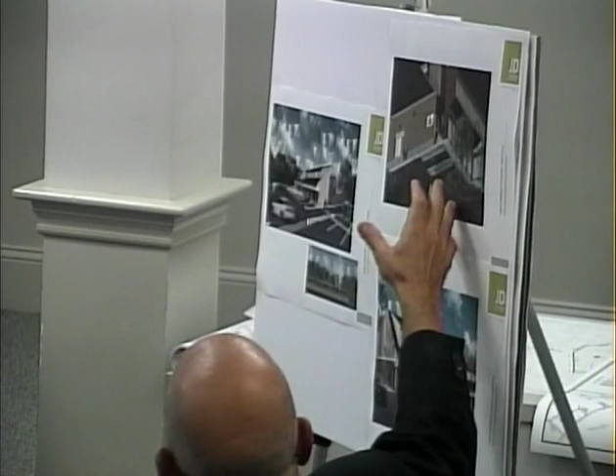So if an accessible visitor was parking out front, they could still come around. Another change was to bring in more landscaping. This was a newly created island to warm up the rear and make it look more residential.

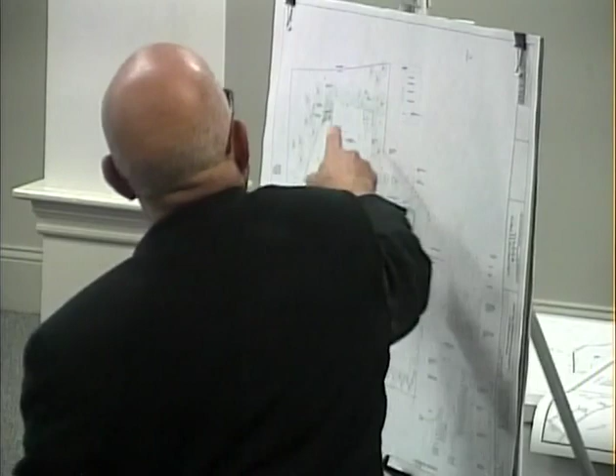At the end of this walkway, against the back lawn area, the dumpsters are presently back here. We had meetings with conservation, and they wanted us to move them farther away, so we relocated the dumpsters, and where the dumpsters were is now increased landscaping, helping that pedestrian connection as well.

Now, did I notice on the rendering at the back of the building, at the rear entrance, that there are two HP accessible spots there now? Again, two handicap spots previously as well, but this is designated for residential handicap access.

Very nice. Could I just ask — is there something I remember Tilly mentioning, about folks without HP plates wanting to just pull up and maybe offload groceries because the elevator's there? Was that just dimensionally impossible to create in any way?

I don't believe so. It's similar to the loading zone for CVS back here — anyone could be pulling up here. We noted that with a 40-foot delivery truck, you can still get around it through the aisle. So somebody could easily pull up, even behind one of the handicap spots, because of this walkway straight through, unload, and then park.

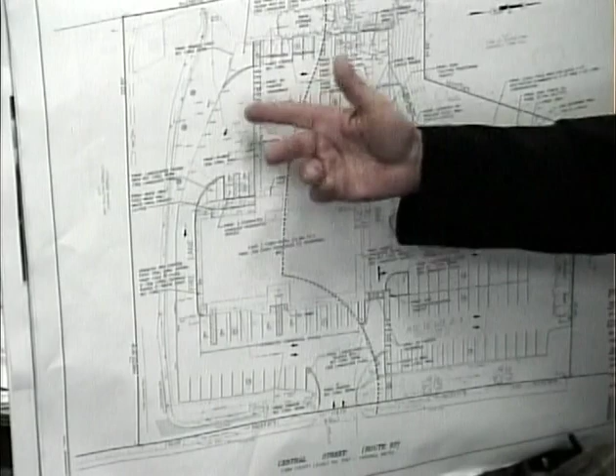What's your thought, Tilly? I think the parking for residents to carry things upstairs should be as close to the building as possible. I mean, I would contend this is 30 to 40 feet or so to go from here to there.

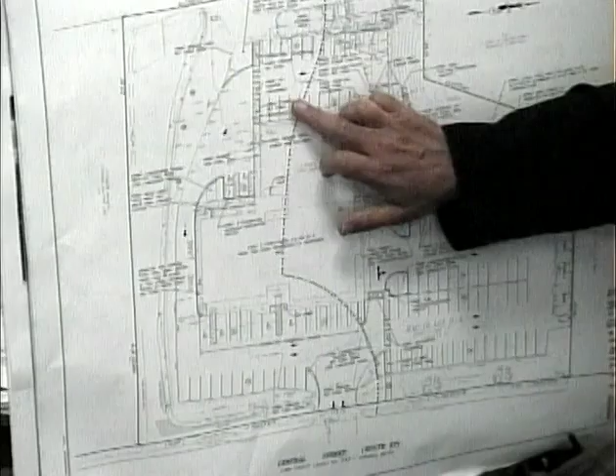I am concerned, and I'm a building owner as well, that if you put a 15-minute spot, it gets abused. People go, oh I'll move it, and then they get a phone call, and next thing it's 2 hours. It's hard to police that.

I understand the concern, but I do feel that this is a fairly short distance. Recall too that we're talking about 7 units, or a population of maybe 10 residents. But they're all gonna move their furniture in, right?

And if they don't move their furniture in themselves, the moving people will have to move it in. That'll happen from time to time, but given the site constraints and the fact that resident parking is right there, I don't know that we need to designate a drop-off spot.

Remember too, that's not the only entrance for residents. There are 2 other entrances towards the front of the building they could also use, which will get them into the building, just not to the elevator.

Can I just interrupt? Sure, one second, because they're bringing up a valid point. This is the only entrance closest or accessible for the elevator. So that'll be used a lot for people carrying things in, whether it's furniture or groceries, whatever.

I was thinking more groceries. A loading parking spot for resident parking only, just something designated for that. You go into parking lots now, and you see designated 15-minute parking, expectant mother parking, veteran parking, so on. And nobody's gonna park back there to use CVS.

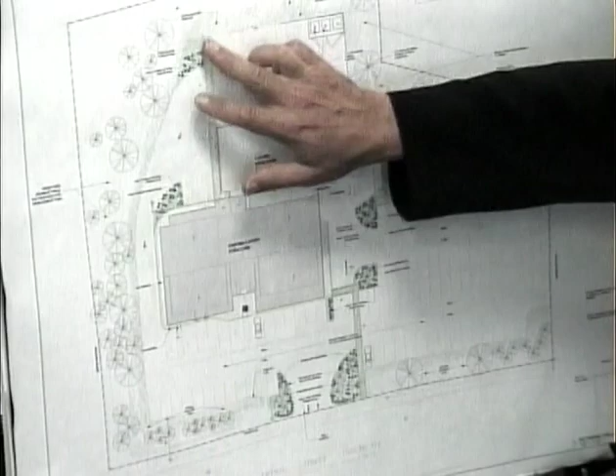The two extra landscaped islands we added in the rear are more designated, feeling this is the more appropriate residential amenity area, with a couple picnic benches back there.

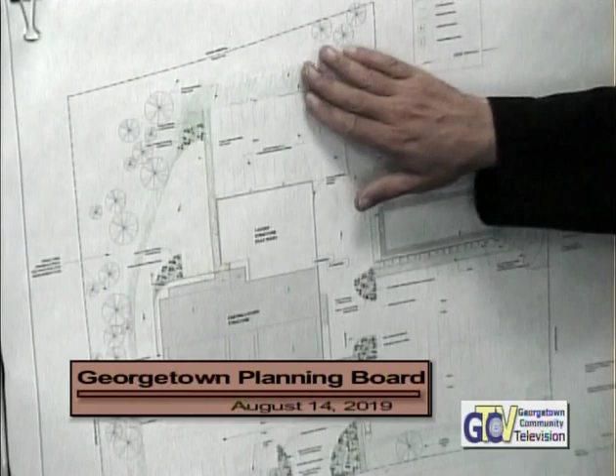That area is abutting, if I'm not mistaken, the future rail trail, isn't it John? Yeah, but there's an elevation difference there? It's not much, as you'd think—it's a very gentle slope up. Overall it's only about 4 feet in elevation change, and then it really plateaus. It'll be the old septic field there, so it's a nice flat area. You get a view of the lake.

Would people actually be able to walk off the trail and walk down to CVS? Or the people living there, can they easily get in there? Yes, there's no barrier—it's all grass, so there's pedestrian access. Very nice.

Very nice. There's a great raspberry patch there too. You found that, huh? You know, pick some raspberries, go make some muffins. For the next meeting?

The top of this septic field is fenced off for safety reasons. We're not necessarily designating it as a recreation area, but people could use it, and at least it'll be safe—no chance of falling off.

Do we have a detail of that fence? Is there a detail in the detail sheet for the fence? It's really chain link, but we're growing vines on it, so it'll be a vinyl covered chain link fence with vine growth, so the vegetation will completely obscure it.

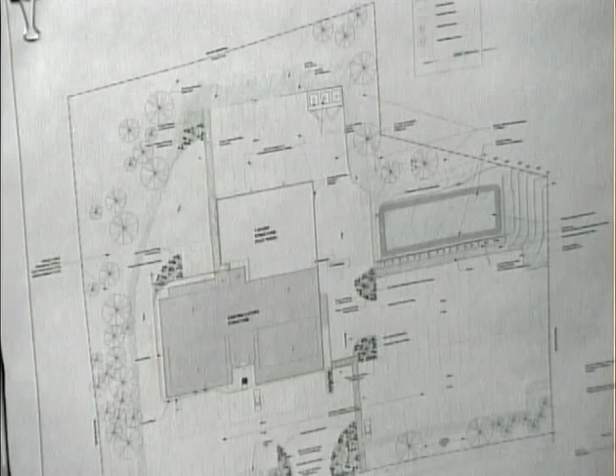Even in winter, it would not entirely obscure it, but a lot of vines—in your package we have a landscape plant guide. We selected a Virginia creeper, which actually holds on to its dry leaves as winter comes. It's still a deciduous plant, but it gets brown, then regrowth in the spring, and it'll be covered with snow anyway.

When it comes to vines, this area is excellent for grapevines. Yeah, that's natural—you could put up a trellis, get nice big leaves, and those will ripen in a couple weeks. We can have our snacks over there. I'm sure whoever's taking care of the landscaping will get creative.

Lastly, it came up in the last meeting—both John and I saw an article in the Boston Globe about 3D crosswalks. It's just a painted treatment that gives you a little pause, like 'what am I driving over?'

Is that what that is? It's very effective from what I've read. How's it oriented? Well, it's done in perspective—you basically paint it that way. We've all taken perspective drawing in grade school or whatever, so you center it and then have the vanishing points on both sides.

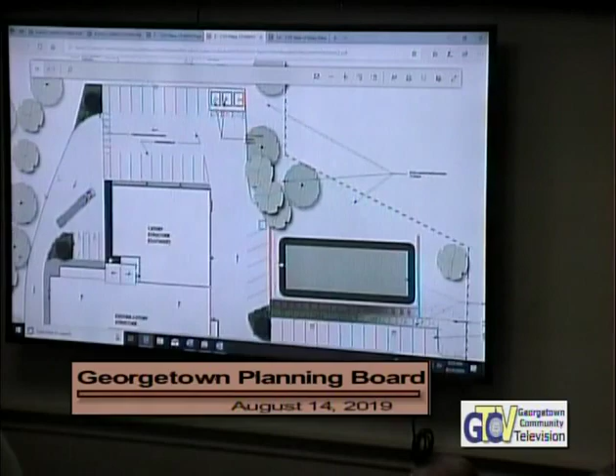People coming out of here wanting to go around the building are gonna have to step down. I apologize, it appears to be a curb, but the intention is that's gotta be flush—it's a flush condition, asphalt to concrete. So from here to here?

So there's no curb at all three of those? Still curb? It's all one line, no curb at the hatched area. So it shows a curb, but it was difficult to do that in the rendering. So that hatched area at the inside of the two walkways, the asphalt is intended to come flush to the walkways.

So you could go from concrete to concrete without rolling a cart up, or a wheelchair through it. Wheelchair, right, yeah yeah yeah.

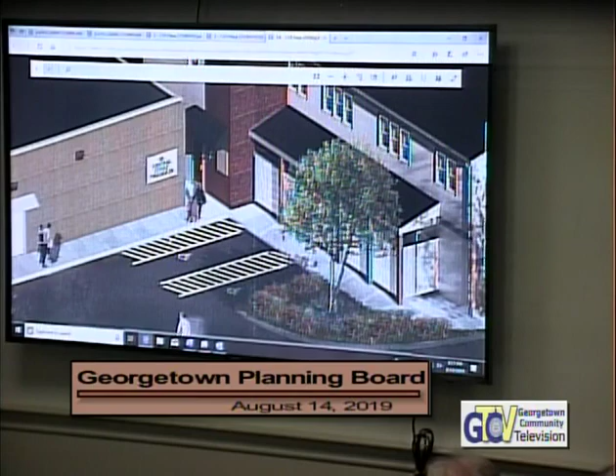We're repaving, by the way—the client's committed to repaving the lot, which was not the case on the last application. I was surprised to see that, and just to make a big difference—really rebasing grade, it's a major endeavor. Adding an inch and a half? Yeah, that's fine, that's huge. So it's all gonna be new top coat.

That'll be the high point, that inside corner of the paved area, so that can be a continuous walkway. I see what your concern was—I was going to make the concrete do that, just to visually connect them more, but we can do it with just level pavement.

You're concerned about people having to walk around that corner—by the time you're there, you'd have to step down and step back up. It's not gonna be curbed there. Now, where the curb is, is that going to be extended? He's saying there's not gonna be a curb there, it's all flush, no curb—I mean right here where the planter is. That's what I was going to ask next. Yeah, that should be flat.

It shouldn't be extended because the water coming off the pavement would go down the side instead of going right to the plantings. The asphalt in front of the planting area would be dropped compared to the inside corner back there. A lot of times we'd keep that curb for both plowing purposes and to retain the mulch bed and soil.

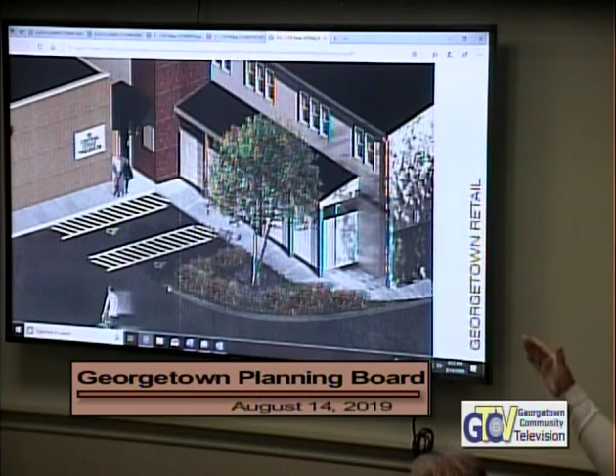Well, this is going to collect your roof water, I assume, but how is that going to happen? It has to run onto the sidewalk, and then it would go into the landscape bed there, and it would absorb into the landscape.

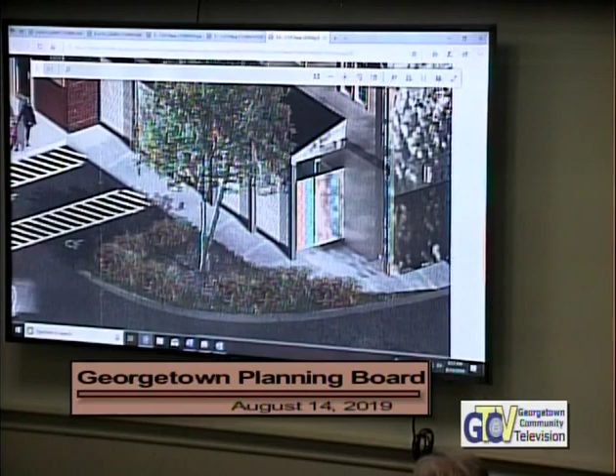Shouldn't something be at the rain pipe, at the gutter here, to collect that water? Yeah, that could be directed just under the slab, since we're pouring all new slab there, and they could run it right into the landscape bed. I think that would be a good idea, because we don't want it to ice up or anything. That's right, that's a simple solution.

So thank you, that addresses the first question. Could you bring the diagram back up again? The second question has to do with, could we look down here, and go all the way down.

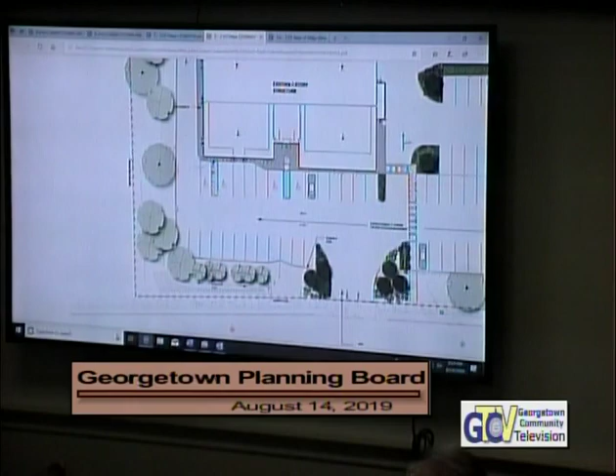That's perfect. Right now the crosswalk is right about here, across Central Street. They're doing it right in front of the post office, there's an island on either side of it. I was just looking on Google Maps. Now it strikes me as if this is probably the busiest section.

I laud the fact that you've got direct access, but I'm wondering if that access might not be better from here. That's a brook there, you're not going to get across it, you'd have to put a bridge, a footbridge. Yeah, there's a brook, it's quite flowing.

But you're driving people into the most active part of the driveway, and maybe a little bridge over it might not be a bad solution. In other words, what you're saying, Bob, if I'm getting it right, is that folks are gonna be coming out this way if they want to be pedestrians, right out of the building, walking out here, and then they have to walk across the entrance over to there to get to the crosswalk, to go to the post office.

Well, that's how it is now anyway. Yes, but nobody lives there now. I thought the same thing, but, like I said, even though it doesn't seem to be shown, I'm sure it shows somewhere on one of these, but historically there was a river there, and there has been in Georgetown, in the last 10 years, in big storms.

That area is sort of a collection area, and in those circumstances you're just as likely to have flooding going across the road. Do you know how big that culvert is, Bob? It's big, it's round, about 3 feet, it's a big water source. Yeah, I don't know, but did you mention that at the Concom?

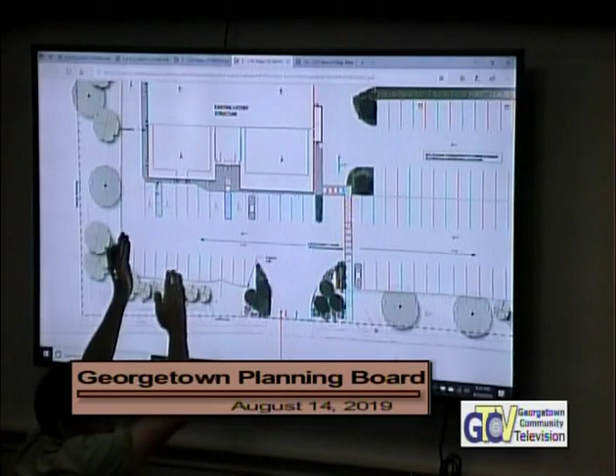No, this is another option here. All of that parking area compared to all of this parking area, where there could be a conflict between pedestrians and automobiles. This is tiny, that's huge, and this is how you get to the drive-through, it's how these people are gonna get to their own parking spots. So I'm a little concerned about that.

If it could be moved to this side, then people won't be walking across the main entrance, and they won't be tempted to just blast across the street.

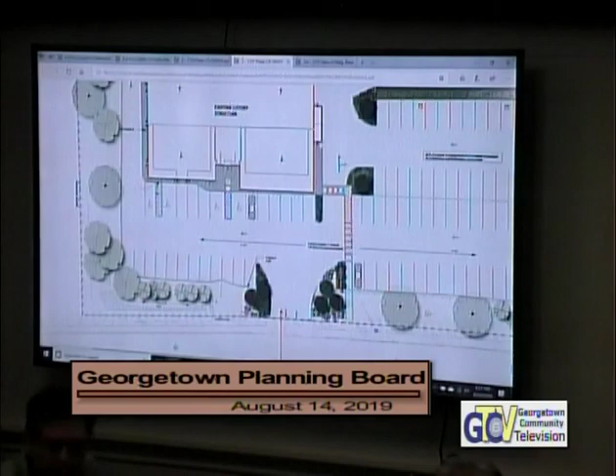We did consider that side after the last meeting and discussed it at length with the civil engineer. Part of the decision was to simplify, since we already have this crosswalk and that was critical.

Because as you say, there's more parking here, people are going to cross over. Instead of doing another crossing here, what happens to those people too? So we felt this was cleaner, with a little more grade change, the walkway could happen there. But then it was randomly coming across, and we'd have to give up a parking space to walk through, right in the middle between cars. I think more people park on the left side. This was cleaner for the pedestrian path.

For a number of reasons it felt like it simplified and defined the pedestrian walkway, because they can come out of the elevator and keep walking straight. The elevator is back here. There's no elevator there, but they can walk down the stairs through the back of the building and walk out.

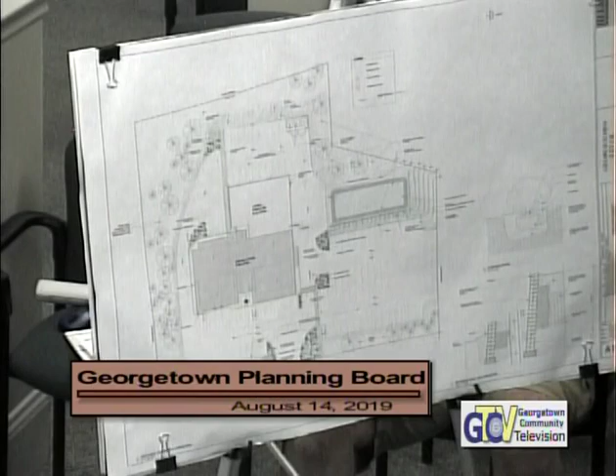There's a doorway there too, but again there are stairs. There are two entrances - the front doorway will get you upstairs, but there are stairs there too. The concern I had was cutting right through the middle of the designated commercial parking spot for a pedestrian walkway. It just seemed more forced.

This, to me, is in the middle of the parking area. No, it's on the edge - you have a huge parking area here and the main parking area here. Maybe it's on the edge of this parking area and on the edge of that one, but an awful lot of cars are going this way, everyone heading up to CVS. But they all have pedestrians associated with them that have to safely get into the building too, and the only way you're going to do that is through a designated main pedestrian corridor.

My experience, coming to CVS before tonight's meeting, was that almost everybody parks right in front of the building, to the left, until those spots are filled - those are the prime spots. I think people are more inclined to park on the left in front of the building if there's a spot available. I'd agree with you, but personally that's where I go first. If those are all loaded up and you can't get a spot, then you go over to the other side, but that's a rare occurrence.

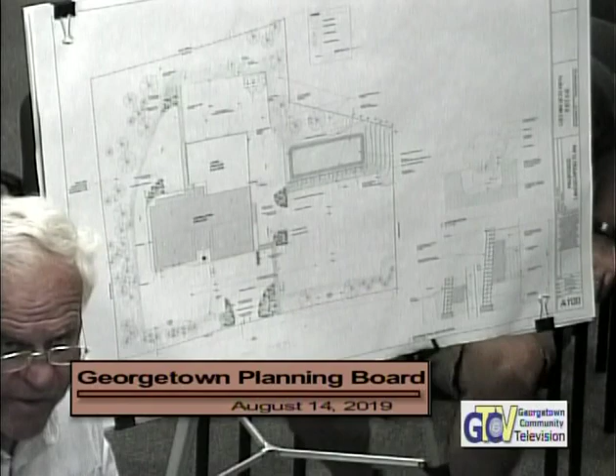You can match it up here, there's the visual. See this bump out right here? That's this bump out right here. Can we get a clean oblique on that, John? From that bump out, and that's on the plan here, this whole area here is not being utilized.

What I was noticing, and this is why at the end of the meeting I had asked if you'd be able to represent the public safety building on the plan for this addition. It would make this a lot easier. If I'm not mistaken, you're building a wall on the eastern side of the septic system, right here. It's well away from that.

It is well away from that, and I drove in there today to look, and it looked to me like your life would be a heck of a lot easier if all of that was excavated out so you could build that wall. Then once it's cleared, the easement would be very easy to establish and grant.

I don't think the town is looking for a transfer of land, just an easement. Well, it still requires town meeting approval to accept the interest in real property, because the town would be accepting that easement. I'm not aware of that. I believe under subdivision it does.

Through the special permit, we may be able to take it. Not take it, excuse me, I'm not taking anything, but accept it on behalf of the town. Again, I mean, once it's defined with public safety, it's all about vehicle turning radius, correct?

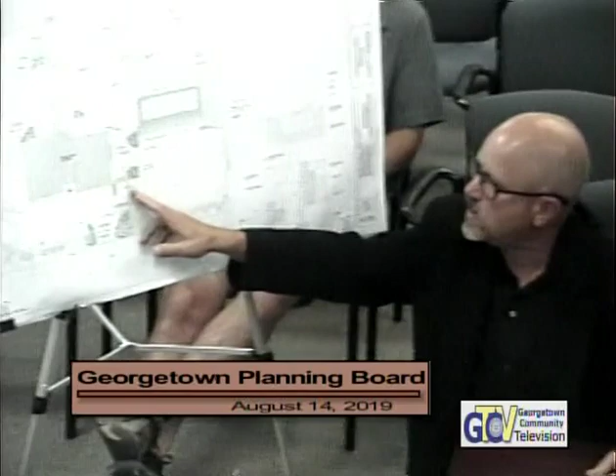This area was designated so people walk here, and it made it cleaner. I just don't see it. People are gonna be parking there and they're gonna cut across the parking lot. That's what they do. I don't think anybody's gonna say, oh, I'm gonna park here but I'm gonna walk over here to get to this crosswalk.

The 3D crosswalk is going there, and there's one right here, and there's a door there too. And again, if we put it here, we're going right through the middle of a row of commercial parking, where there's an entrance to the residential spot.

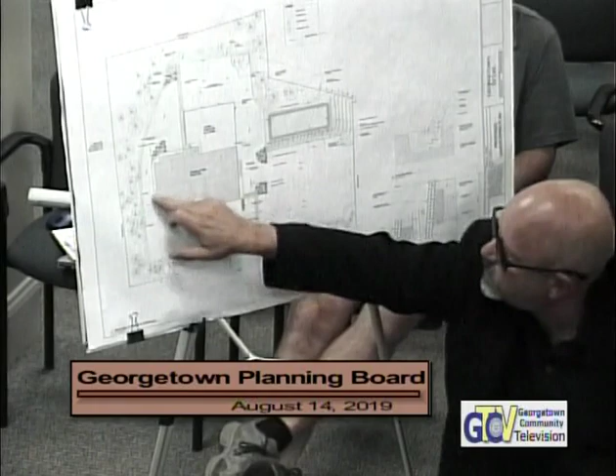There's an entrance, you can walk from here all the way around. And that's exactly what you're asking people to do, to go shopping at Crosby's, which is right across the street.

That's why I don't think they're gonna do it. I think that's what they're going to do, and that's exactly what people are going to do, whether there's a crosswalk there or not.

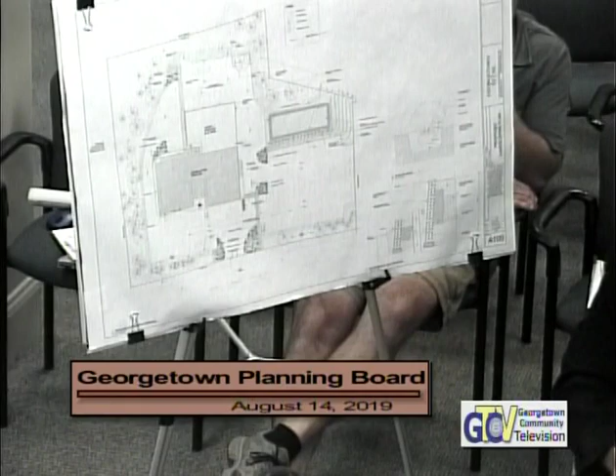Right now they walk straight down. But we're giving them a more designated, safer spot. We definitely have to do that. So my question is whether that's the most appropriate, optimum place.

As the chair mentioned, I do believe it's a little bit of six of one, half a dozen of the other. It's hard to argue that one's significantly better than the other. My argument is that this is just simpler and cleaner.

And again, on that same basis, I discussed it with a civil engineer who designs this stuff and we agreed. The part I like about it on the right is that, keep in mind, folks are still coming in and pulling in that driveway so that they can use the drive-through.

As you pointed out, there is a crosswalk that has to be designed there for those folks, you already need that one there. But I don't see people wanting to use it to draw residents through where there's traffic to the drive-through. Again, we're talking 10 residents, but we're talking about the supermarket across the street.

What do you guys think? We have to give it, it's about 10 past 9. I'll go with the majority, but I don't know what the position is. That's all I'm saying. Right, we don't even know.

Where it is, or where they have it drawn is what I go with. Joanne, I agree, because I always park on the left. You know where you stand. Tilly, where it's shown?

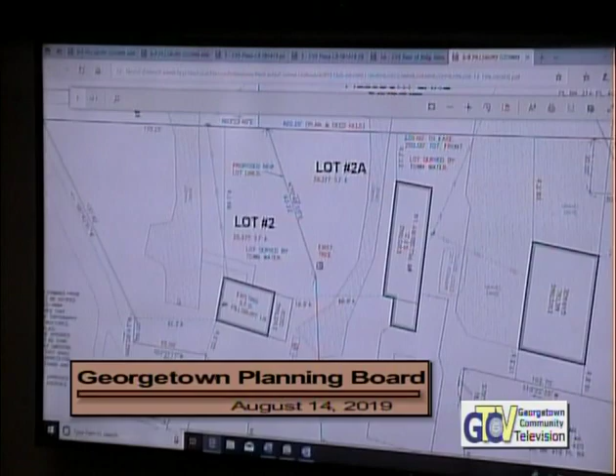And just to be clear, that proposed new lot line there seems to be sectioning off a little bit of what was an old driveway. Yes. And so I'm presuming that that's gonna be removed, is that what was mentioned? It's an existing driveway. She presumably has the option to either remove it or grant an easement to the future owner of number 8 to use it. So is it still a usable driveway? Yeah, I mean, this is existing conditions, so that's where the pavement ends now.

But as you can see, number 6 already has a paved drive on the other side. That's the gotcha. Since the same family owned the entirety of the property, they didn't visualize a lot line.

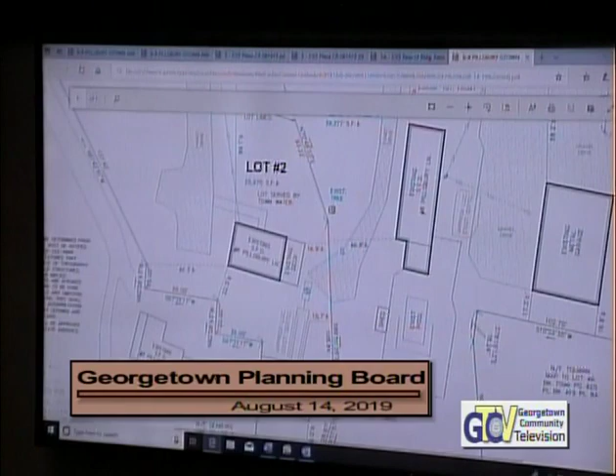You can't really jog around it because of the setback off the existing deck and the approximate location of the septic system, so that's where the line had to go. The line did get jogged around the existing tree, so that the tree would stay with number 8.

There's no immediate plans, as far as I know, to sell either property. I think she lives in number 6 and her mother lives in number 8, so they'll essentially be in common ownership for some number of years to come. Perhaps to put it in a trust or something to that effect.

I had one question, if I may. Go ahead, sir. No, go ahead, you please. You applied for a revision on an ANR plan.

Or did you apply for a revision on a subdivision plan? This application was just an ANR. I know, but when you applied for it, you gave us an ANR backup. Did you give us any documentation, or did John search that? We probably submitted the current deed and the previous plan.

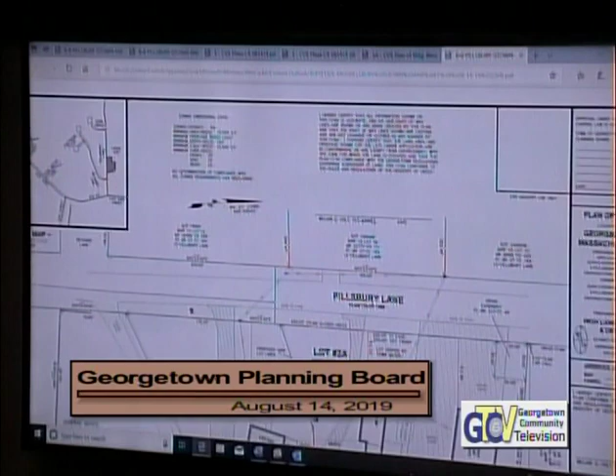That's a really good statement to have on every plan, which is usually on every plan, especially this one. One of the three out of that court case that the judge came down with.

So this would come back to us again in the future if one of the houses gets sold, or to grant an easement, or to further subdivide. But we're not there yet. You guys don't even need to do anything for an easement. It could come back as a further subdivision of proposed lot 2A, too. She could theoretically split the existing metal garage off on its own lot if she wanted to.

Which is why I was concerned about the two fifty on our property. That's why I was concerned. I don't know, that's what I think would be required. She's never done a title search on this, because this property is way too active not to have a title search, in my opinion.

And the other thing is that we do know from previous action this year and last year, that we only have 21 days to take final action. That's right, no agreement can be had of extending, even if both parties agree to it. This is an A&R.

Yep, okay, so he did file this with the town clerk. I was going to point out that it came in early July for her to submit this. But you didn't show up, it was Holt that came. He was kind enough to put off on submission willingly. You held off? Yeah, thank you.